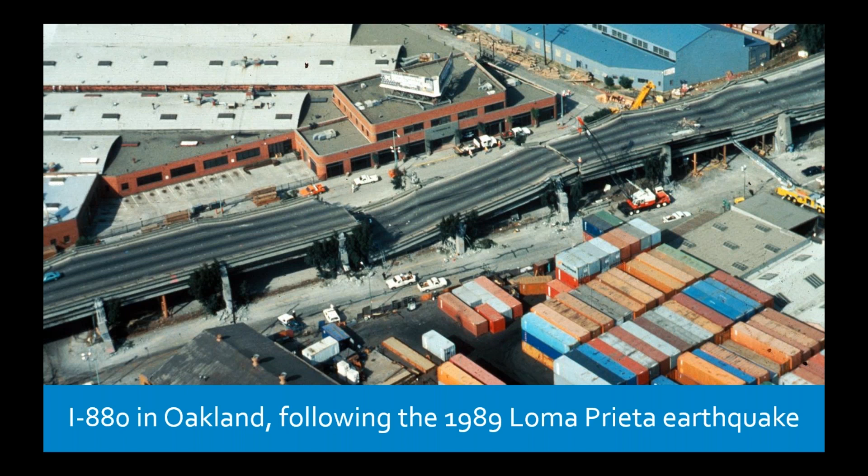So how do we get here? Some might say it was an act of God. In 1989, the Loma Prieta earthquake struck the San Francisco Bay Area and damaged several major highways there, including I-880 in Oakland, the Central Freeway in San Francisco, and the Embarcadero Freeway in San Francisco. Two of these highways were eventually removed.

That's the Embarcadero Freeway, which you see here, which was transformed into a boulevard, as well as the Central Freeway in San Francisco, also removed. And I-880 was repaired, but it was rerouted outside to the edge of the urban core, so it no longer disrupted the neighborhoods it traversed through.

This is generally taken as the start of the Highways to Boulevards movement, although there are a few examples that come from before this era, most notably the removal of Harbor Drive in Portland, Oregon. So while it may appear on its face to be an act of God, there's an underlying tension involving highway building that feeds into community dissatisfaction with some of the highways in their area.

So if we look, for instance, at the city of Baltimore, we see that this 1959 design here, 3 highways are meant to intersect in what's now Baltimore's Inner Harbor. That's I-83, I-70, and I-95.

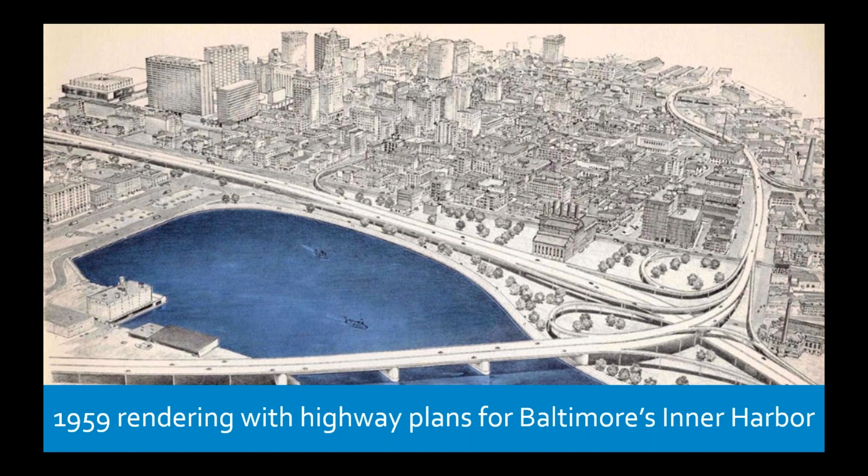But a substantial amount of community opposition stopped each of these projects. It's mainly community dissatisfaction with the inflexibility of major roadways that only serve a single purpose, and that's moving cars at a high speed. So the community stopped not 1, but 3 of these different highways.

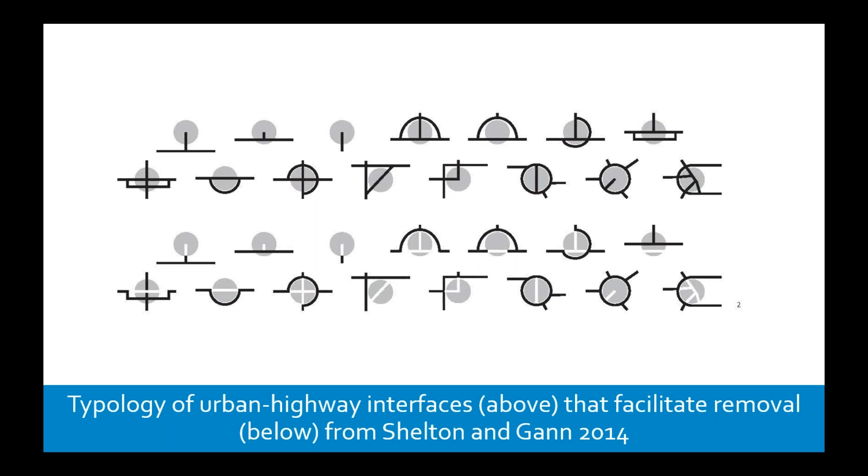Now, there are a number of benefits associated with highway removal, which makes it appealing. Through removing a highway and converting the right-of-way into city streets or boulevards, a city can gain a vibrant public realm that offers community members places to relax, shop, and enjoy each other's company. It can gain economic gains through the opportunity to reclaim acres from the former right-of-way for development, which boosts the city's tax base, provides access to jobs, and increases household wealth along the corridor. And it gains the additional benefit of a healthier environment by dispersing traffic across multiple streets rather than concentrating all the pollutants on a single road. And the hallmark of all of these projects is that the street serves a wider variety of users than a highway, which caters solely to automobile drivers.

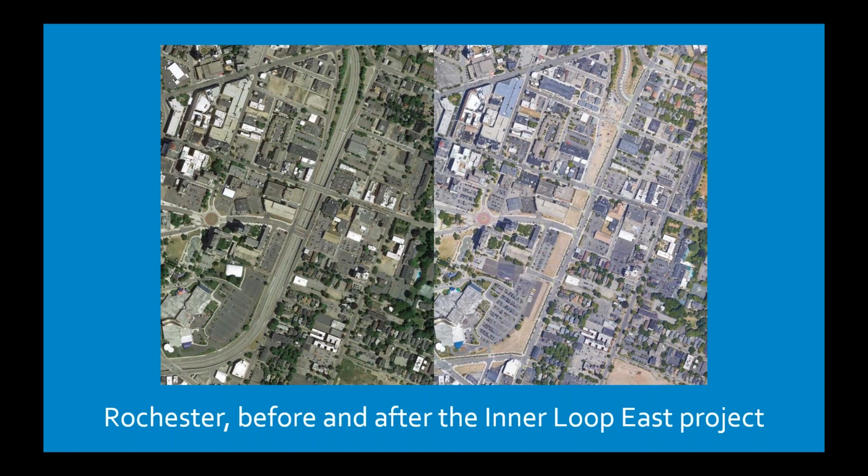So with that introduction in mind, I'll now turn it over to Anne and Erik to tell you how they've achieved the success that they've had with the Inner Loop East project.

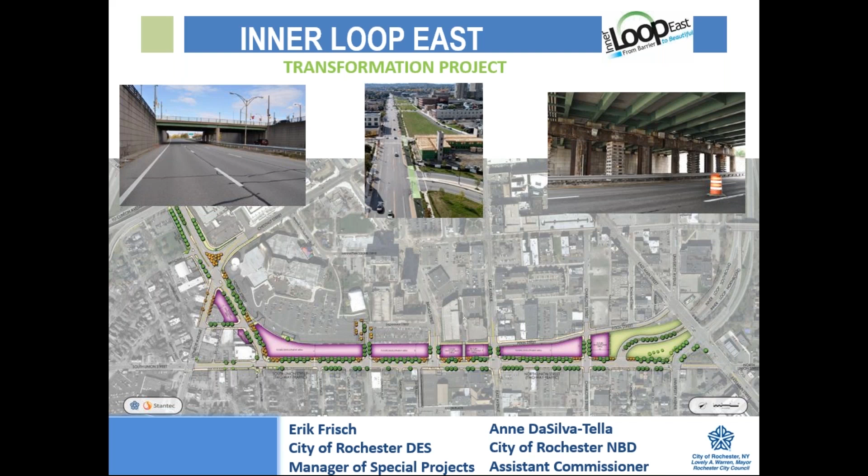For those of you who are unfamiliar with us, Rochester is situated in western New York State in the Finger Lakes region on the southern shore of Lake Ontario, about an hour or so from the Canadian border. But our downtown is located where the Erie Canal once crossed the Genesee River, near the majestic High Falls of the Genesee, which powered our early industries. And our culinary contribution to the world, whether we like it or not, is the garbage plate, and you're welcome.

The Inner Loop Expressway historically encircled downtown Rochester in a tight noose-like form. The section of expressway that we removed, the Inner Loop East, is highlighted here in purple, about a 2/3 mile segment.

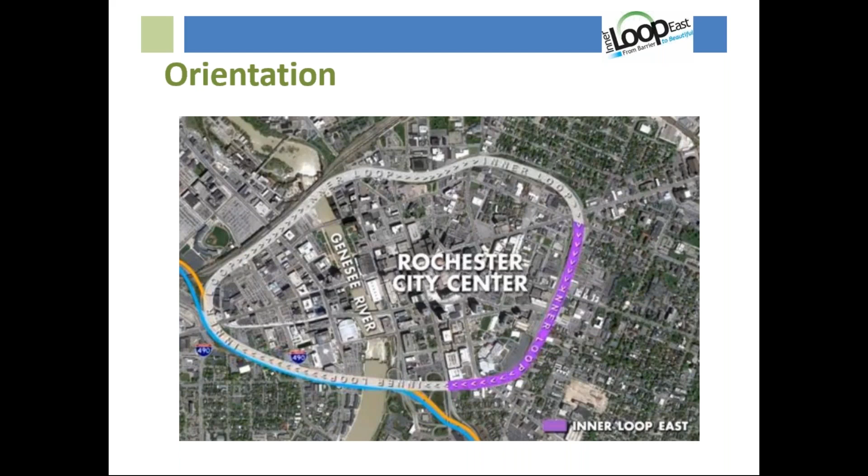As a brief history, although the metropolitan area's population has continued to grow over time, the city of Rochester's population peaked in the mid-1950s at just over 330,000 people. In the early 20th century, with the automobile population exploding, our city was clogged with congestion, and city leaders were looking to solve this problem.

Ultimately, they chose to double down on car-oriented solutions such as expressways. The idea was that the Inner Loop Expressway would better distribute traffic through and around the downtown area. The Inner Loop would ultimately connect to I-490, which it does today, but it was also intended to complete the extension of I-390 into the downtown area, which never occurred, and a northern expressway, which was only on the drawing boards and never moved ahead.

To build the Inner Loop East, approximately 150 parcels were demolished to make way for the expressway.

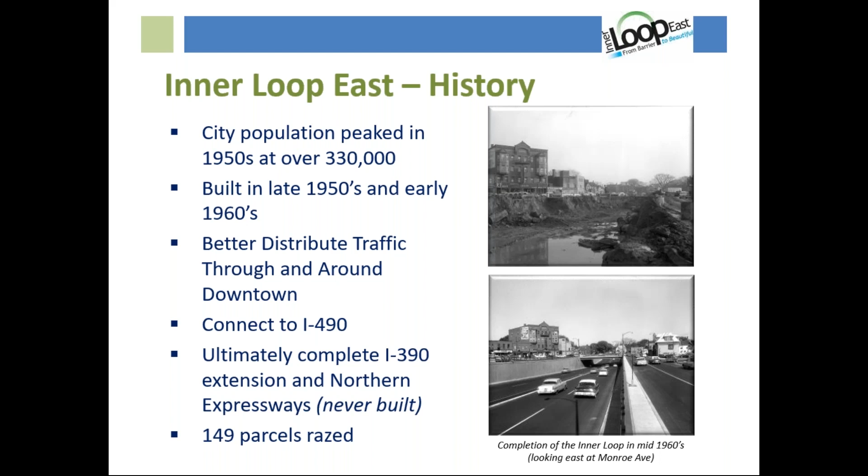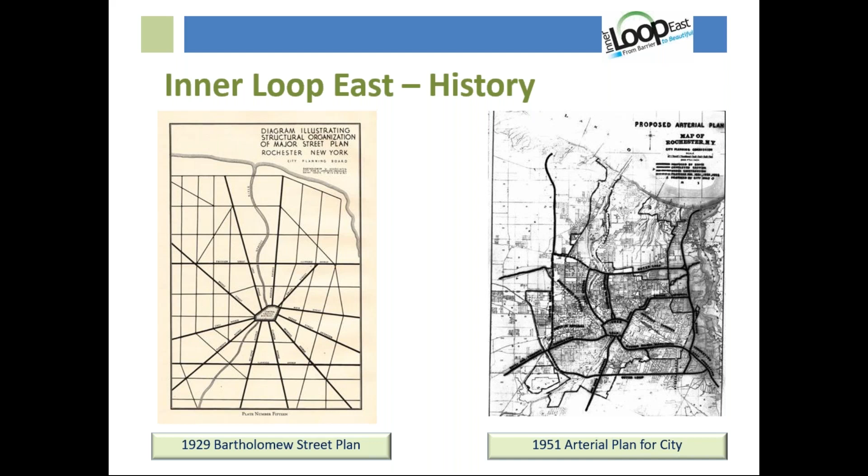The idea for the Inner Loop was hatched as early as the 1920s, as shown here in the Bartholomew Plan, demonstrating a ring road around the central business district with arterials emanating in each direction. It eventually made its way into official arterial state highway plans, as shown on the right, where the name Inner Loop was coined.

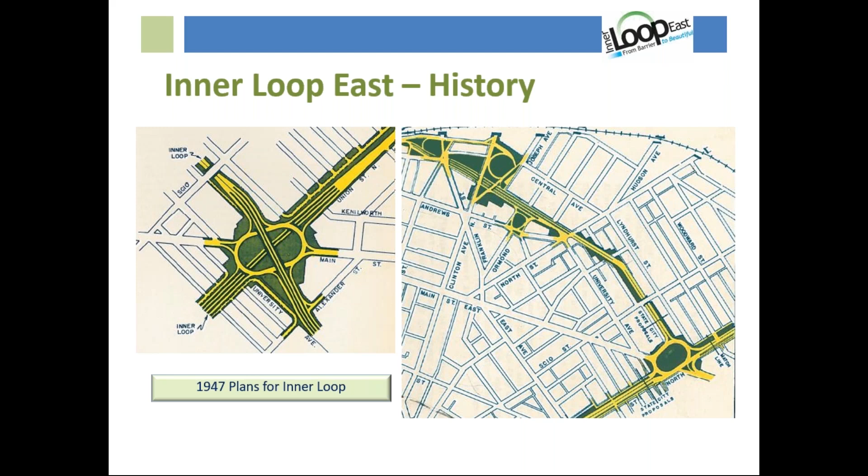Here are some detailed looks at early designs for what eventually did become the Inner Loop. If you look closely, you'll see that there's a difference between state and city proposals for what was to become of the Inner Loop. Ultimately, what did become the Inner Loop turned out to be a bit different than what's shown there.

In this image, you can see, although crudely drawn by yours truly, the path of the expressway going through neighborhoods prior to its construction, demonstrating the rich urban fabric that existed in this area when the expressway was built.

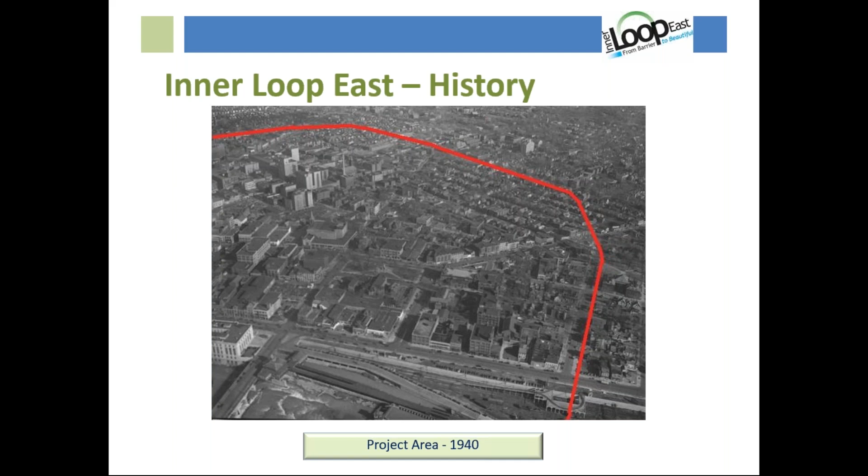Or maybe it'd be better seen from above. This image from 1940 showing a city largely densely built, almost a medieval street pattern.

Fast forward three decades and you see the Inner Loop being built, as well as a number of other urban renewal projects, clearing what was perceived by many to be blight and making way for a car-oriented future. As an aside, if you look up Rochester City of Quality on YouTube, you'll see a hilarious but real depiction of what our city leaders were thinking at the time for what was, as they said, a city of progress.

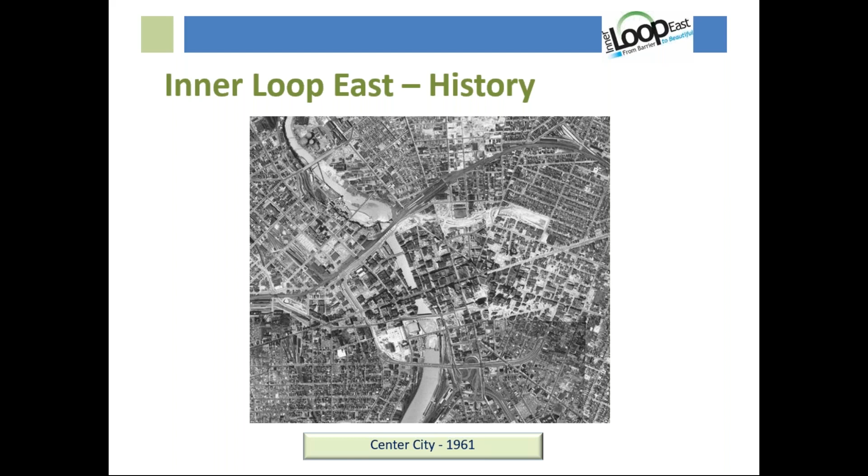As you see, the Inner Loop is built in that noose-like pattern around the downtown core, which in one way defined downtown Rochester very easily, but in another way stifled its growth and its connection to adjacent neighborhoods.

The Inner Loop Expressway, of course, was a state-owned facility, reference route 940T, principal arterial expressway. This was state-owned and under state jurisdiction, consisting of 4 to 6 expressway lanes with parallel 2 to 3 lane frontage streets. The frontage streets were the jurisdiction of the city, and the expressway was jurisdiction of the state. Entrance and exit ramps, all the kit and caboodle of what you would expect on a highway corridor. As much as 12 lanes in total, and 355 feet wide at its widest part.

But because some of these expressways were never built, this section of the Inner Loop Expressway, at least, never carried the traffic that it was built to handle. As you see there, somewhere between 7,000 and 11,000 cars a day in this section of the Inner Loop Expressway.

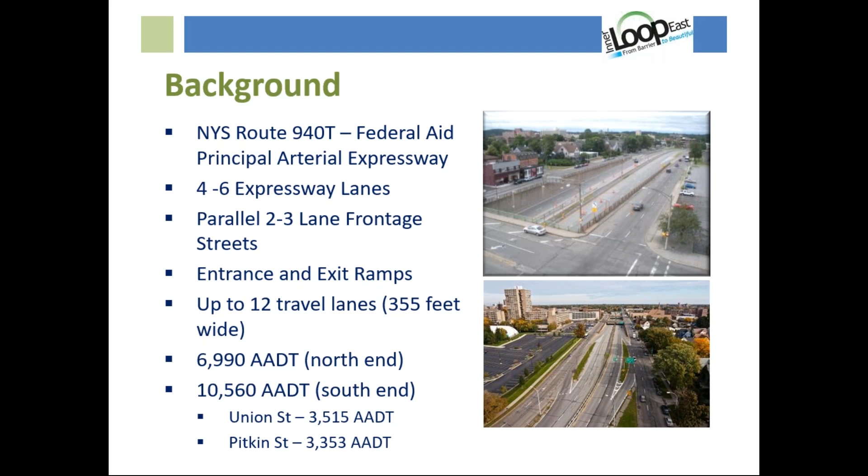When combined with the adjacent frontage streets, you're talking about traffic volumes that are reasonably posted on a standard 2-lane city arterial street. Obviously, there would not be major traffic impacts by removing this facility and distributing that traffic to the existing street grid.

There was more going on. The Inner Loop facility was aging and deteriorating. It was unsightly in many locations. There were structural issues, substandard design features, and safety concerns.

You can see the gentleman running across the expressway there where it came up to grade, because it was easier to do that than to try and make your way around to one of the few crossings of this facility, which separated densely populated, vibrant city neighborhoods from the downtown core. And of course, as with any type of facility like this, it depressed property values and discouraged active land uses along its frontage.

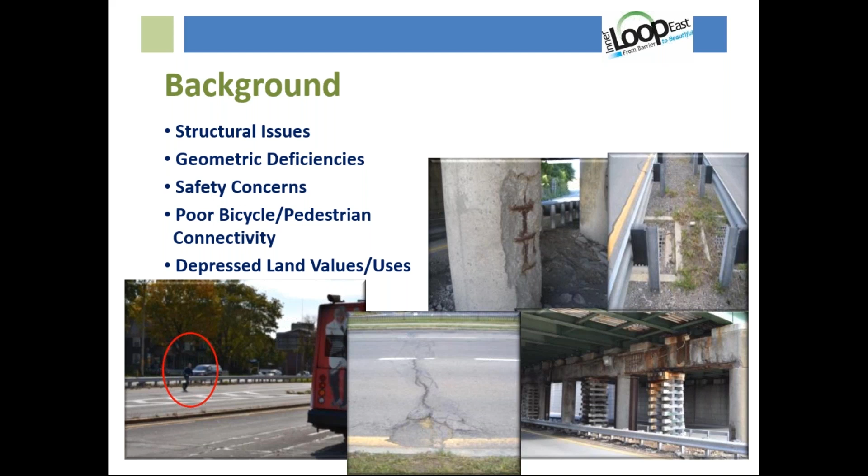Removal or replacement of this section of the Inner Loop Expressway has been featured in every planning document produced by or on behalf of the city since 1990's Vision 2000 plan. So you could say it took us only 25 years to get from vision to reality.

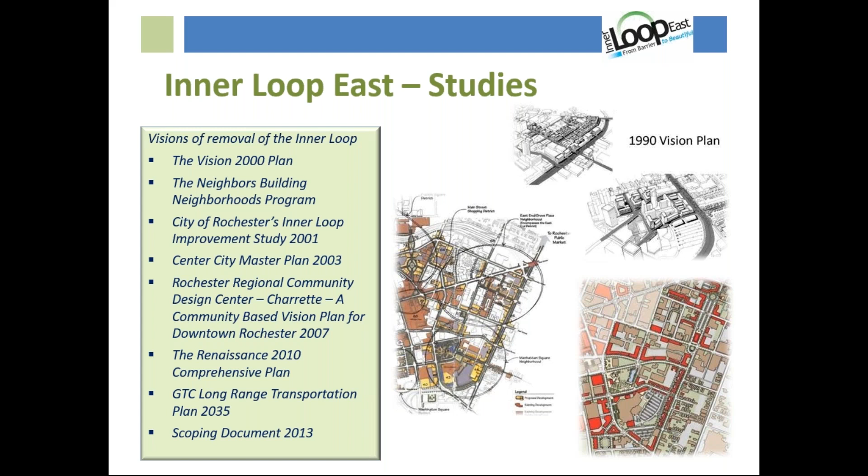A federally funded planning study conducted through our metropolitan planning organization, the Genesee Transportation Council, was completed in 2001, and the formal scoping phase for the Inner Loop East project kicked off in 2009. Although before we had even kicked off the scoping phase, our late great Congressperson Louise Slaughter had already secured all the funding needed to conduct the engineering and design for the eventual project.

The reasons for doing this project, of course, are obvious, I'm sure, to all 700 or so of you listening. We want to reconnect our neighborhoods and correct historic wrongs. We want to create new, clean, mixed-use infill redevelopment sites, basically creating a whole new neighborhood that connects downtown with adjacent East End, Park Avenue, Neighborhood of the Arts, Monroe Village, and everything to the east.

We want to enhance the bicycle pedestrian environment and connectivity therein. Obviously, when there are only a handful of connection points across this expressway, that discourages bicycle and pedestrian activity. So although you have densely built development on either side, that exchange between the two was limited.

We want to promote livability. Our downtown is booming with residential growth. We wanted to continue to see that and have that bleed back and forth between the neighborhoods. And of course, not to mention the long-term maintenance costs and operations costs of having a grade separated highway versus a city arterial street, and save considerable funds when doing so.

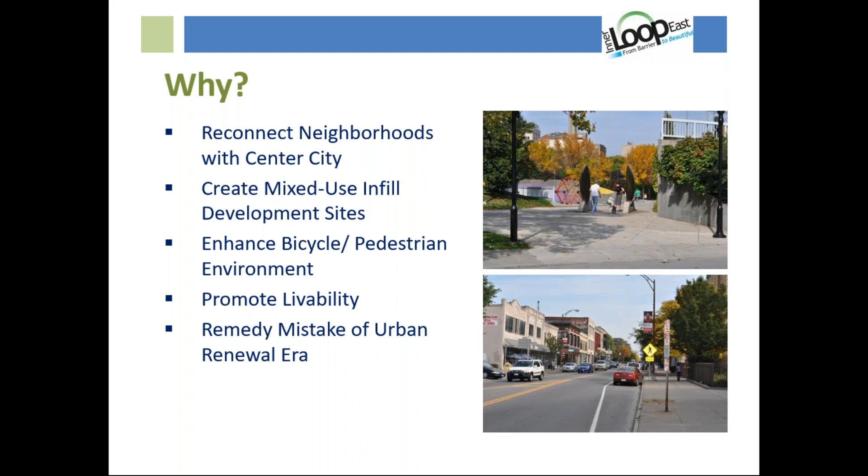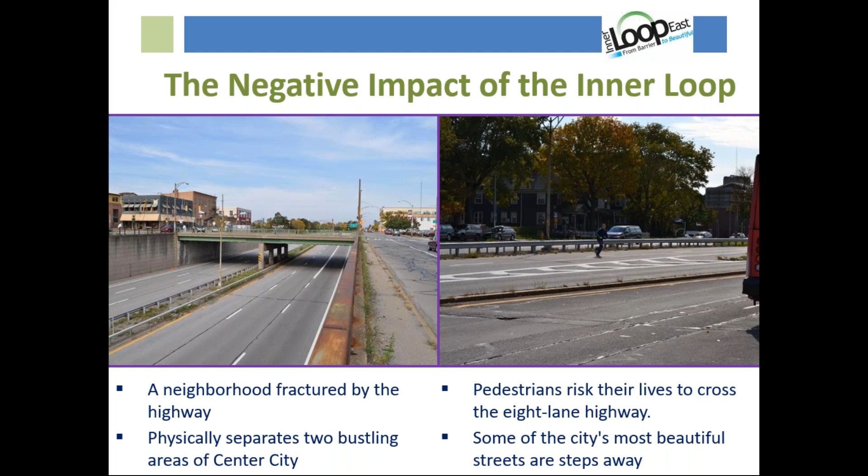As I mentioned, negative impact of the inner loop. Again, these are pictures that show the facility as it was, the neighborhood being separated, safety concerns, non-standard features, depressed property values, etc.

Even so, this project was not viewed as a transportation project by state officials at the time, but more as a community development project. State transportation officials at the time felt that there was no real transportation benefit to the project. So we couldn't obtain funding from regional formula transportation funds to do this work. We had to find non-traditional sources.

Thankfully, we timed this pretty well because the Tiger program came into existence at this same time. We tried first during the first round of Tiger, and we were admittedly premature. We tried again, I think 2 years later. Much better attempt. We were still unsuccessful, but we met with USDOT down in DC to discuss our project, received great feedback, which led to us fine-tuning our project and most importantly, producing an airtight benefit cost analysis.

And ultimately, in 2013, we were awarded a Tiger grant that paid for the lion's share of this project cost. I remember the day because it was my birthday, and it was the best birthday present I could receive.

The downside, of course, is that we had to then turn this project around very quickly. If you recall, Tiger had very quick turnaround times to go from design to completion, get this funding out on the street and get people to work. So we turned this project from preliminary engineering to construction documents in less than 1 year, working with the design team at Stantec, who are our design consultants for this project. We worked hard and we got it done.

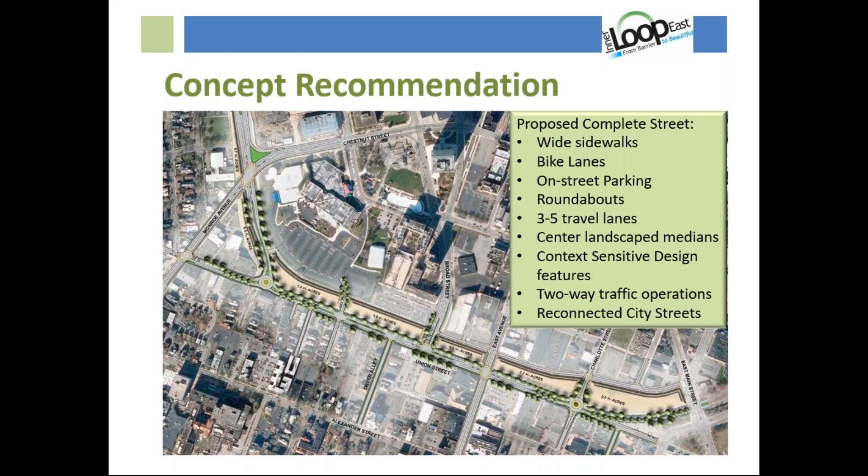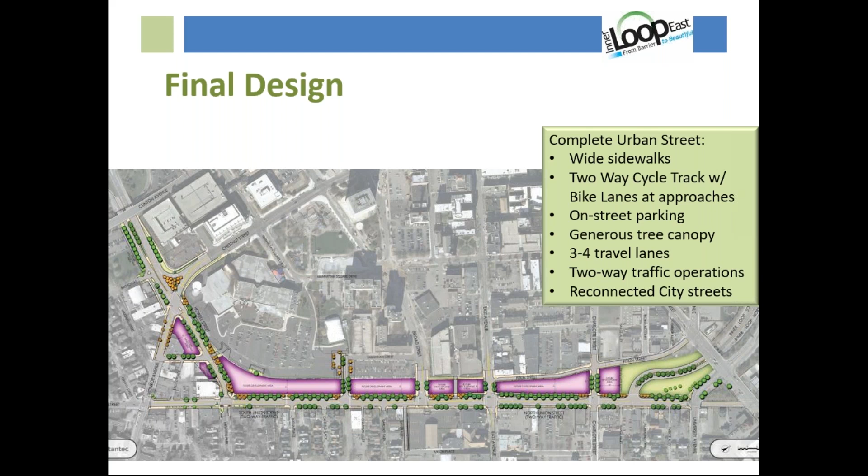This project's design progressed dramatically during that public involvement phase as we went from preliminary to final. The early concept largely took the form of the inner loop that preceded it, with its curvy shape, and we had 2 roundabouts as part of that. But in the public involvement process, we ultimately eliminated those roundabouts and took a more traditional urban street grid approach, which created more walkable streets and more developable land. We even changed adjacent street entrances to residential streets to driveway style to discourage cut-through traffic. That's a result of that public input period.

The recommended final design, the cross-section shown here, was generally 3 lanes with on-street parking, a 2-way protected bike facility, wide tree lawns, and wider sidewalks. The narrowed right-of-way from replacing this highway with this city street created over 6 acres of land for redevelopment.

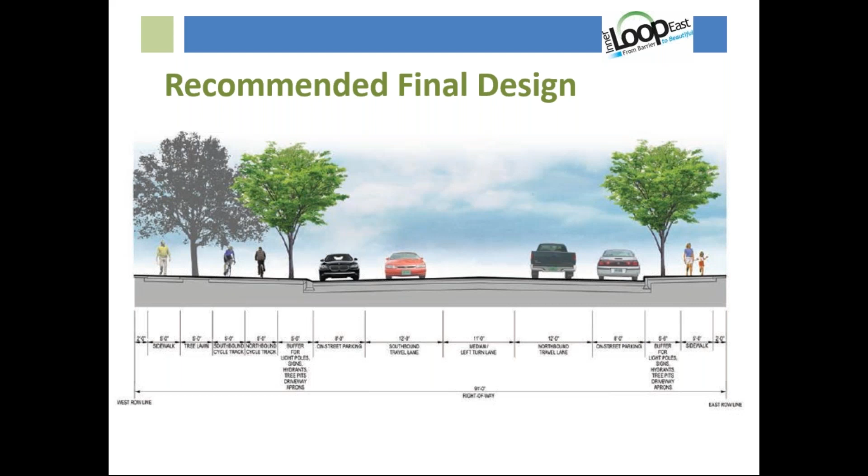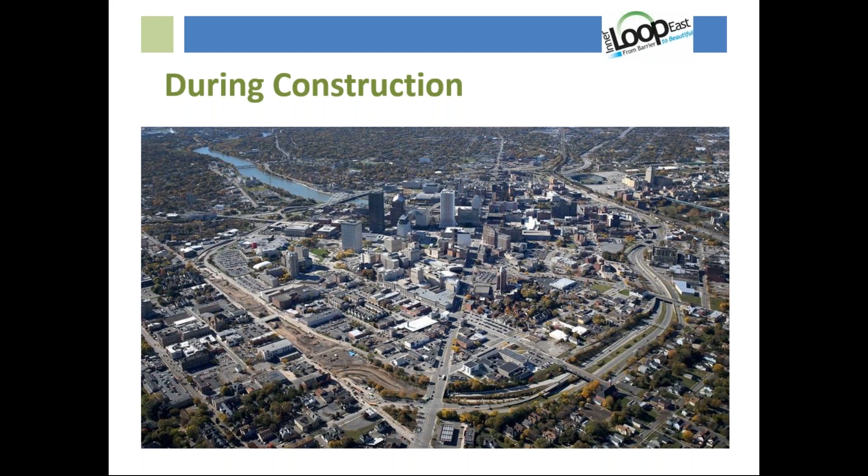Here are some views of construction occurring at the time. It's downtown Rochester right in front of you there, and you can see to the lower left the Inner Loop East corridor under construction. Roughly 120,000 cubic yards of fill was brought in to do this work.

Here's another picture during construction. As you see all that earth being brought in, the biggest construction impact during this project was actually the removal of the 3 bridges at East Avenue, Broad Street, and Monroe Avenue, which required traffic detours.

Although a project of this size you would think would have considerable construction impacts, in fact the return of two-way traffic to the historic Union Street corridor proved good for businesses on that corridor, and they actually blossomed during the construction period as they had a front door to the construction.

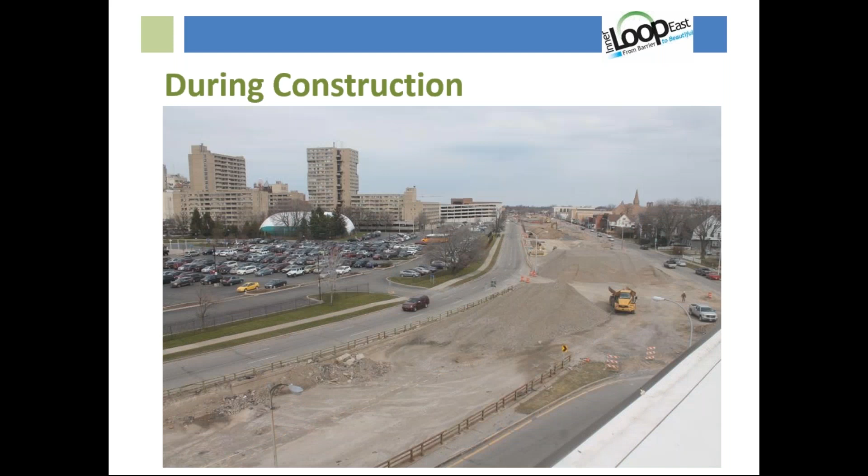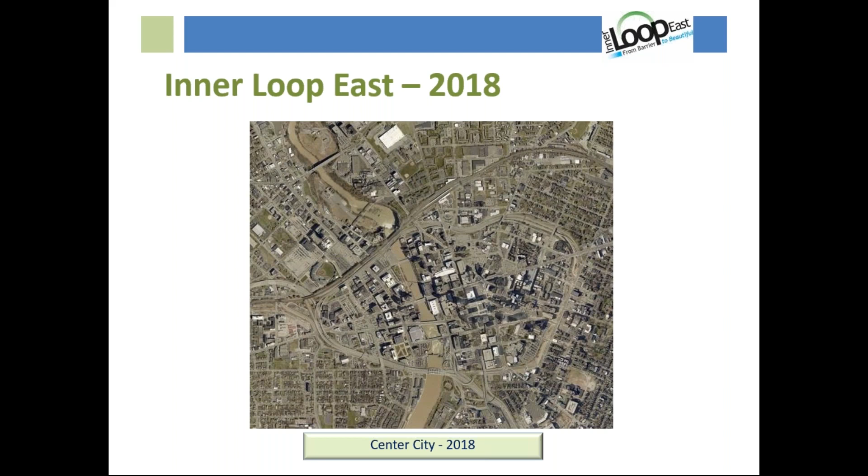Here's another picture showing all that earth being moved. So again, returning to the picture from 2014 prior to construction, fast forward to 2018 at the end of construction, and you can see Union Street restored, the expressway removed to the bottom right there, and land being created.

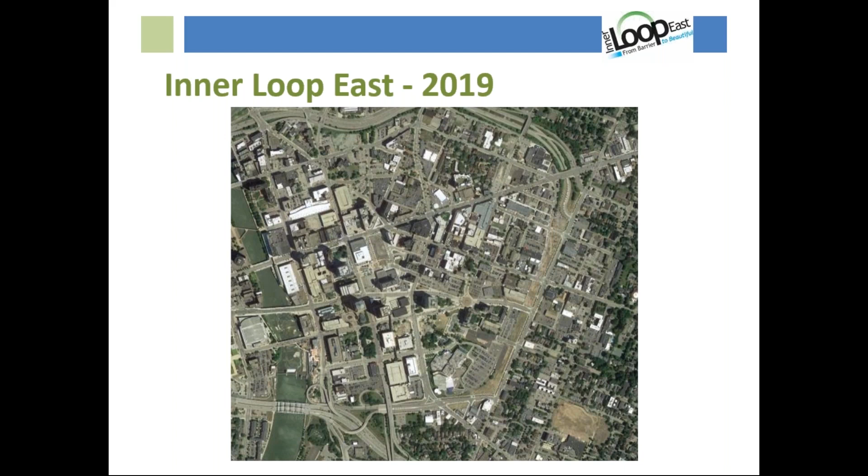Bicycle and pedestrian traffic has risen dramatically since the highway was removed, and this project is now complete as shown. The most recent bicycle and pedestrian count in the corridor showed a 50% increase in pedestrian activity and a 67% increase in bike traffic within the corridor.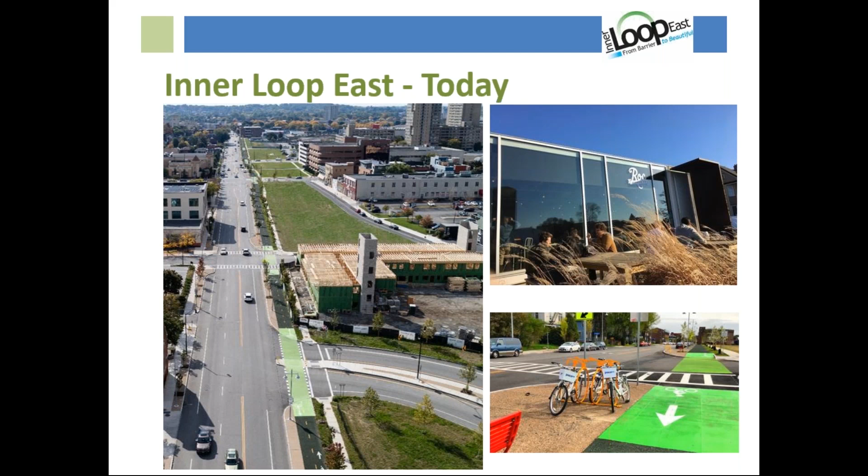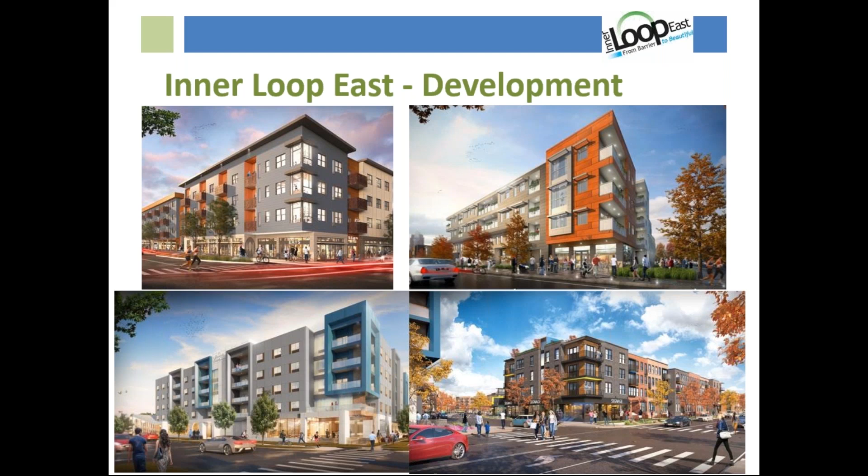I want to credit, and maybe he's even listening, Jacob Mason, whoever you are, on Twitter for this interesting juxtaposition of old and new. I'll show that one more time. So this is the expressway and what existed at one point, and this is it now, showing construction underway, the two-way bike facility, the reduced width street. These are some of the pictures of developments that Anne will be talking about shortly.

But of course, we're not done. There's a lot more Inner Loop left to go, and so we are now turning our attention to what we're calling Inner Loop North. We're ready to see what we can do.

Goals for Inner Loop North, similar to Inner Loop East: look into the potential for highway removal or reconstruction, better link our historic public market with the downtown area, reconnect University Avenue, which is currently severed by the Inner Loop, and potentially narrow East Main Street, bringing in considerable additional mixed-use infill development and open space possibilities in this park-poor neighborhood.

We secured $1 million to conduct a planning study through New York State that'll examine the feasibility, look into preferred alternatives, and do a full-blown benefit cost analysis on that preferred alternative.

It's considered by regional economic development officials an economic development priority, and it'll connect with our ROC the Riverway Riverfront Investment Initiative, where the Inner Loop crosses the Genesee River and presents a barrier to north-south bicycle and pedestrian traffic along the river.

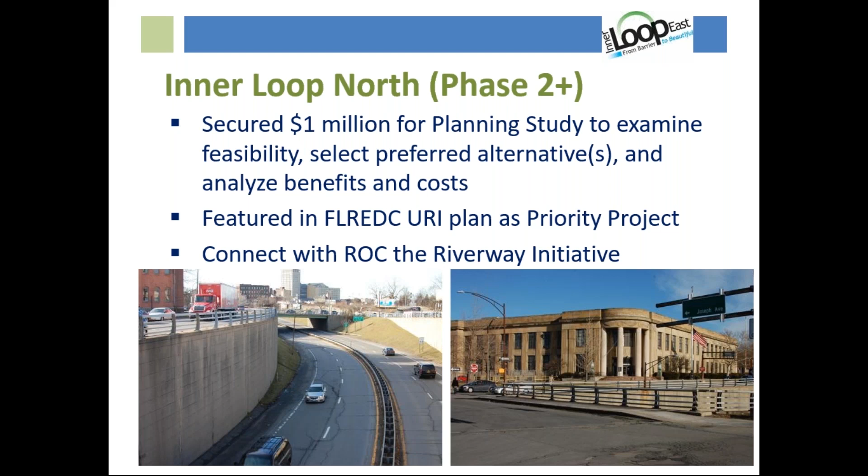It can have greater benefit to the community, but it definitely will pose more interesting challenges. It's got considerably more traffic volumes, and it's a much larger facility on the north side. But where there's greater challenges, there's greater rewards.

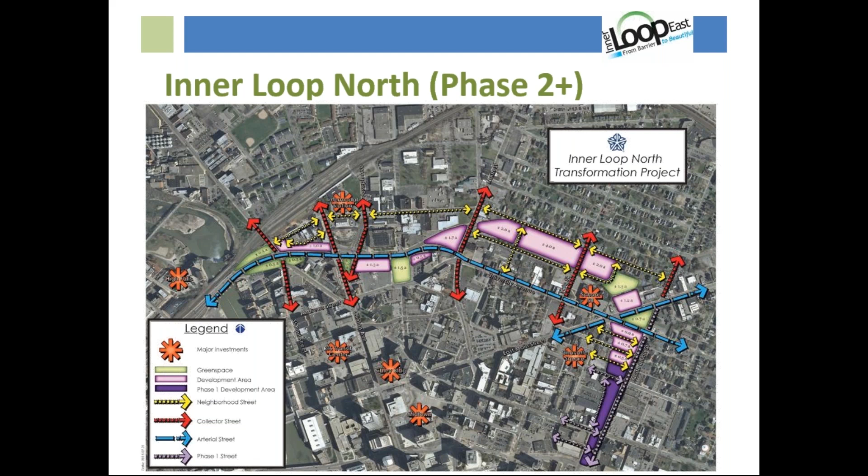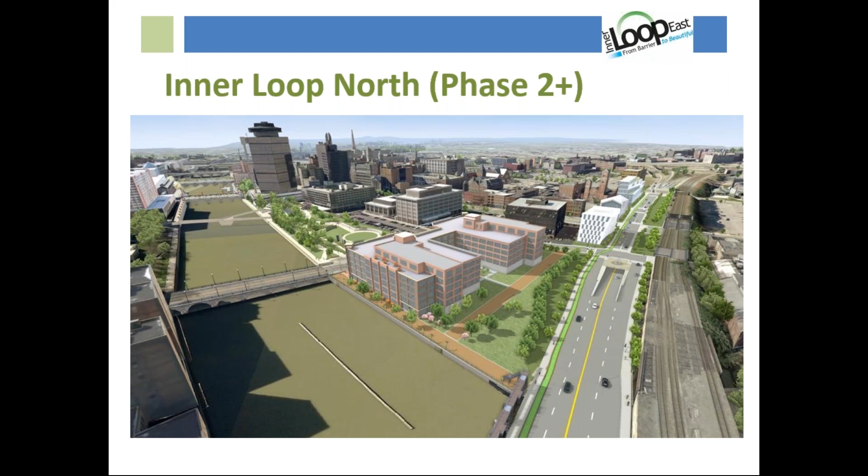Here are some potential, very preliminary, high-level concepts for what could be, just to get your creative juices flowing. Cities across New York State, as was mentioned before, like Buffalo, Syracuse, New York City, are in the midst of their own efforts toward highway removal. New York State is a partner in these efforts, as they are here, and we're looking forward to more success stories from New York State and beyond.

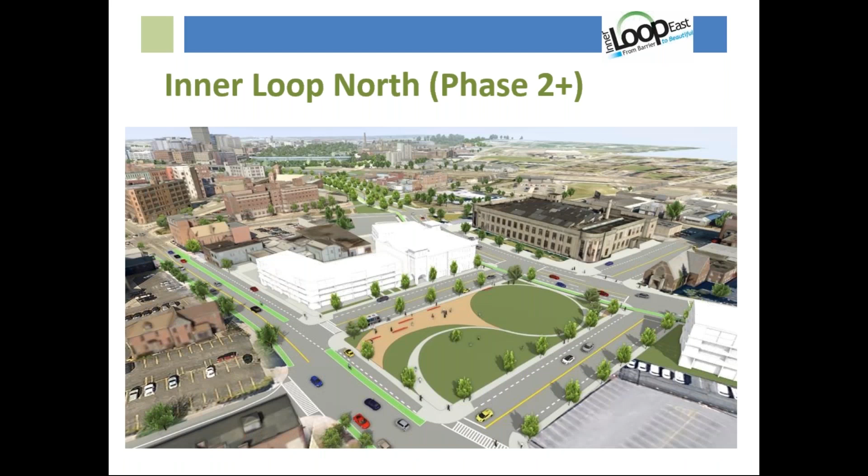So that is the transportation section of this presentation. I'm going to turn it over now to Anne DaSilva-Tella, Assistant Commissioner of Neighborhood and Business Development, to discuss the development and land use side.

Thank you, Eric, and good afternoon to you. Again, my name is Anne DaSilva-Tella. I'm with the city's Neighborhood and Business Development Department, and I will be speaking to you today about the land use and development side of this Inner Loop East project.

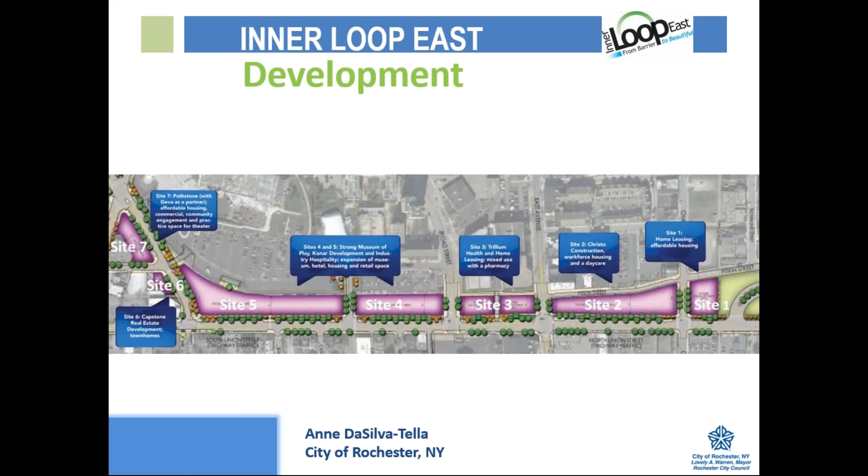I will follow this general list of topics in order, taking you through the timeline, talking a little bit about our public meetings, acquisition from New York State DOT, the RFP process, the projects that we subsequently selected and their current status, as well as the overall impact, which we call Inner Loop East by the numbers.

This project comes over to the development side largely around 2014, when the street transformation project is well underway, but now we're turning our minds to what would happen after the development would be completed in December 2017.

So in 2014, we undertook a series of land use and design studies that involved lots of community input, stakeholder meetings, and focus groups. And we came up with some really nice design ideas and land use possibilities.

Nothing really happened after that until about 2016, when we're really thinking about RFPing these parcels now for development. And so we go back to the community for public meetings, specifically asking what folks wanted to see in these 7 development parcels that had resulted.

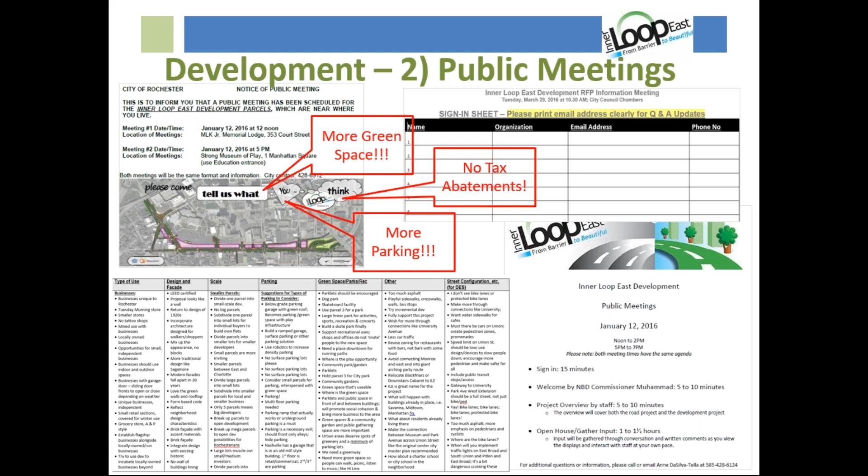As I said earlier, let's talk a little about acquisition of the land, because obviously you're not going to get to development if you don't control the land. Typically it's owned by the DOT, but that might vary depending on where you are. Not all of it was owned by the DOT, so begins a very intense period of searching the archives, mapping, and coming up with who owns what, using survey maps and all of that.

I would advise a lot of research at this point, because in researching, somebody came up with a document showing that when the inner loop was being designed back in the 50s, an agreement had been made with the state DOT that we would sell the land for 50% of its value at the time. Not quite sure why, but that meant today we would buy the land back from them at 50% of its value, since they only paid 50% at the time. This information worked very well in the city's favor, and we were very glad to have found it.

Part of acquiring the land, if you're the municipality, is to start early, I would advise, and talk often with the state. Their processes can be very protracted, and there can be many sub-agencies that need to speak into the process. Don't forget to identify your acquisition costs through whatever legislative process you have in place.

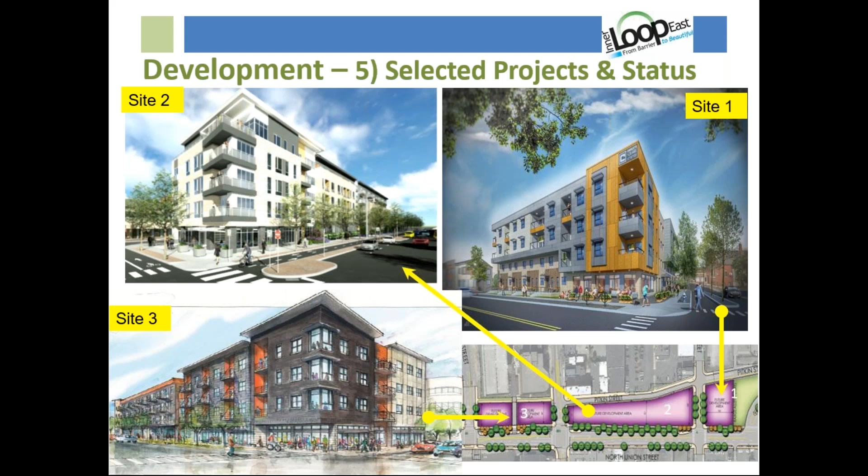Moving on to Sites 4 and 5. These are lumped together because the winning bid for this RFP was a consortium of three different entities: a developer of housing and mixed-use projects, a commercial developer who does hotels and mainly restaurants, and the third partner was the existing National Museum of Play, the Strong Museum of Play, located to the west of Inner Loop Site 5.

Across Inner Loop Sites 4 and 5, we're going to have the museum expand its footprint by 100,000 square feet, the four-story parking garage, 236 units of mostly market rate housing, and a 120 all-suites hotel directly adjacent to the Museum of Play. The museum is undertaking this expansion and parking project because its own studies showed these were the things needed to expand its visitor reach beyond a 4-hour drive radius, attracting visitors from Toronto, Cleveland, Pittsburgh, and beyond. This 120 all-suites hotel will largely cater to families with young children so they'd actually stay at least one night in Rochester.

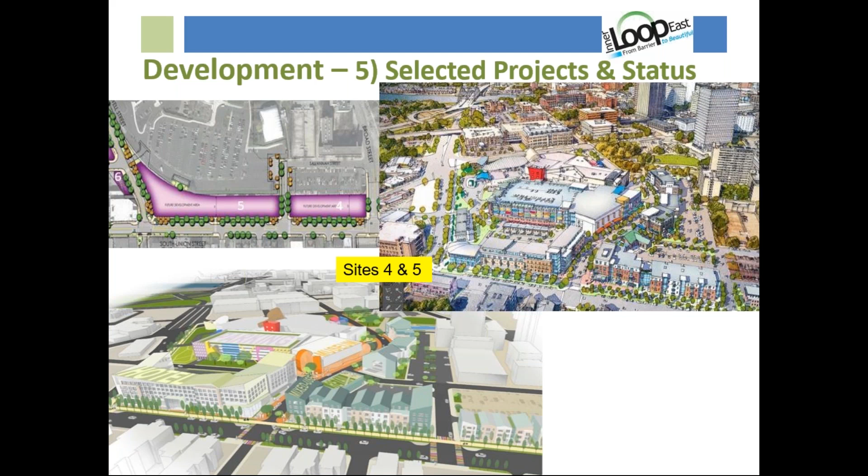There will be 6,000 square feet on the ground floor of largely theater, practice, and community space. We have a local theater called the Geva Theater that will lease space in this area and hold community practice and rehearsals, which will definitely add to the active ground floor space we were seeking. The funding application for this project was submitted in December, and closing will not occur until the project has been funded. As for the 5 townhomes, we're about to plan the closing on the land.

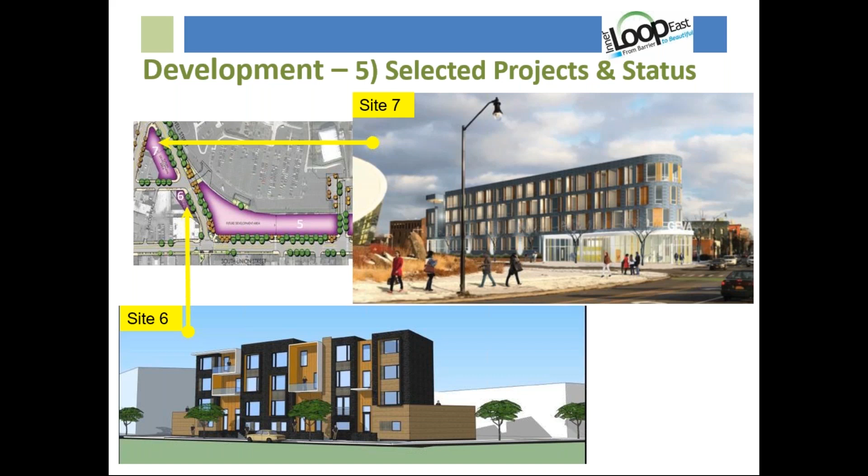So in summary, when all said and done, this would have been a very nice project where we were looking at a $22 million public investment on the transportation side that would have created 6 acres of development-ready sites on 7 parcels, and it would have resulted in $229 million in private investment.

This is a real coup as far as cities go, for sure. We will have over 150,000 square feet of commercial space, over 500 housing units, 170 permanent jobs, and over 2,000 construction jobs. And best of all, we would have reconnected the neighborhoods that were previously fractured by this 8-lane highway. We will have a much safer walking and biking environment for our residents, definitely a more livable community with jobs and growth in the city's tax base.

And so this is really exciting for us, and that ends my presentation on the development side of this project.